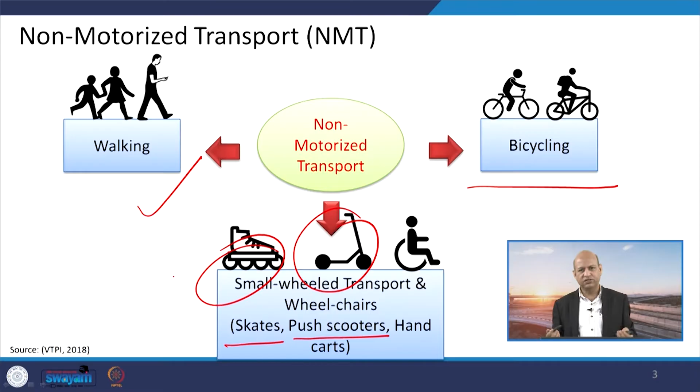So mobility through walking is one part of non motorized transportation, the other is bicycling. If you have bikes, pedalled ones, small wheeled things like skates or push scooters or hand carts, small carts that can be pushed or pulled, trolley systems attached to a bicycle, wheelchairs or scooters - all these are part of non motorized transportation, because it does not use any engine, IC or otherwise.

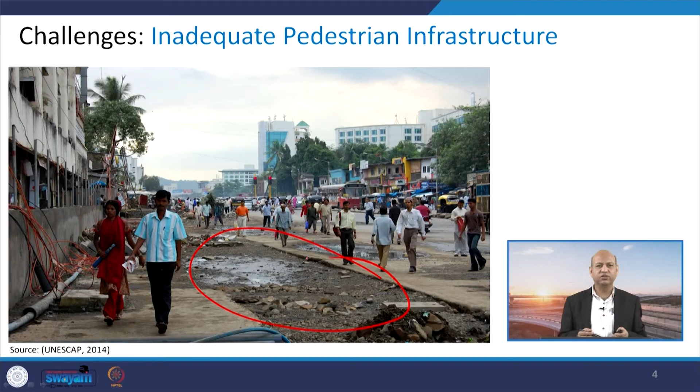Well, there are challenges. As you can see in this pictorial representation, pedestrian infrastructure is not adequate. If we do not have good infrastructure for pedestrians, people do not feel encouraged to use footpaths which are not in proper shape, and there are imbalances, potholes, so even injury can occur. So if NMT is to be promoted or improved, we need good infrastructure for it.

Another part of infrastructure is lighting. If pedestrians do not feel safe walking at a particular location, they will avoid it. For underpasses, if sufficient light is not there, we feel endangered, that something bad may happen, or some antisocial elements can approach us. So that space must be properly lit.

Again, if there are no sidewalks at all, we have to walk on the main road where there is a lot of mixed traffic - cars, scooters, three wheelers. That is challenging because you are at risk of being hit by a vehicle; if somebody is not able to apply the brakes, they may hit you. So these kinds of challenges are there, and we need separate footpaths or walkways.

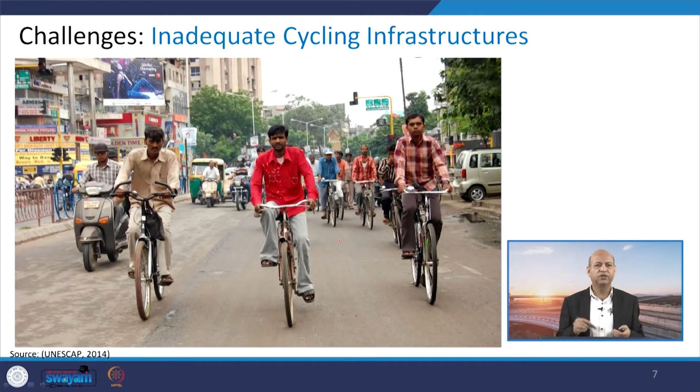Also, if you want to use a bicycle but don't have separate tracks for bicycles, and have mixed traffic on the same road, you will again feel at risk, as vehicles with higher speeds can hit you. That is why adequate infrastructure for walking or cycling is essential for promoting NMT, non motorized transportation.

Then, how do we define an advanced city? Some people may argue that it should have big skyscrapers and metros and all those kinds of transportation systems.

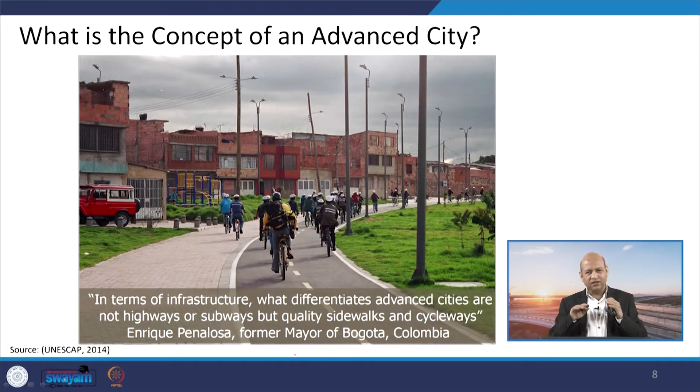One very interesting definition given by former mayor of Bogota, Colombia: in terms of infrastructure, what differentiates advanced cities are not highways or subways, but quality sidewalks and cycleways. This promotes a healthy way of living and quality of daily life, because it encourages us to walk and cycle, and it also helps calm the environment, since IC engines create noise. So the noise problem is there besides air pollutants and greenhouse gas emissions.

If you promote sidewalks and cycleways, people feel incentivized to walk through different streets for their daily work, and this is healthy. So the advanced city in his vision does not mean having very hi-fi technologies used only by a particular segment of the population while the majority struggles to move from one point to another. That is not the advanced city. The city which makes facilities accessible to all or the majority of the population—only then can we say it is really planned and advanced.

You see the concept of advanced city here: this car is using this road, and here also this car is using the road, so two people in cars are using this much wide road width, while these people walking—again two people—are left a very narrow lane. This infrastructure particularly discourages people from walking. So the concept of advanced city should move towards giving a lot of space for people to walk.

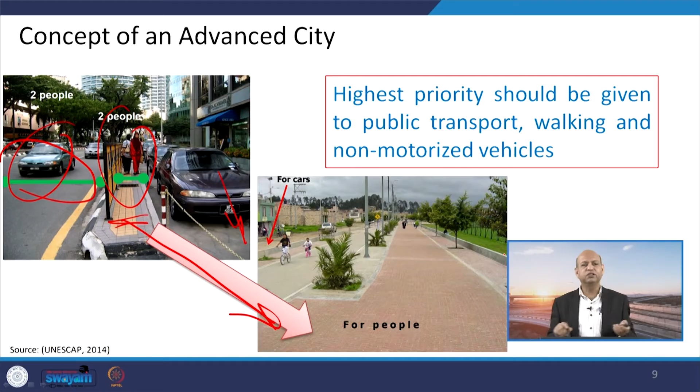Let me share my experience with you. In Germany, we saw for the first time that pedestrians and cyclists are given first priority to cross the road. If you put your feet on the road, all traffic applies brakes and allows you to walk through. Initially we were quite hesitant because we were not accustomed to this kind of facility or priority, but later on we became confident to walk through zebra crossings and those points where people are given preference as the first priority to cross the road. This concept should be inculcated and integrated into the public transportation system as well as the complete transportation system of the urban environment.

You can see a positive sustainable reverse traffic pyramid. Right now in Indian cities, a lot of space is occupied by private vehicles—cars, two wheelers, three wheelers—and very narrow space is left for people walking or using bicycles. If you reverse this trend and apply this reverse traffic pyramid, we give first priority to people walking or jogging using walking lanes, or using bicycles, utility bicycles, carts, or trolleys—those things can also be used with bicycling. Then after that comes the public transportation system.

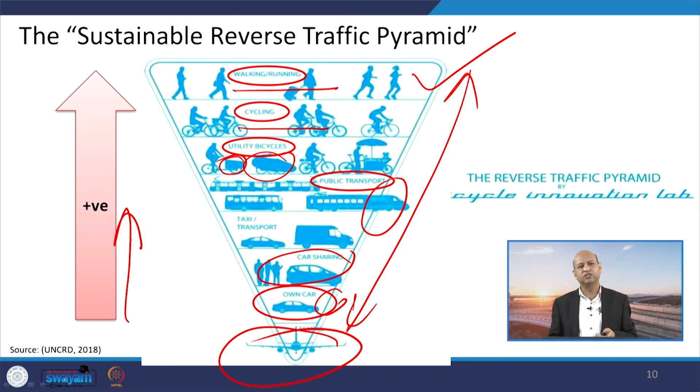Then the commercial sector—taxis, transportation, trucks—followed by car sharing and pooling, with privately owned cars last. Air traffic is mostly isolated at the corner of the city, so it is always last. If we design the urban transportation environment to give first priority to those walking, running, and bicycling, a clean environment can easily be achieved. This is the positive way of encouraging sustainable transportation through a non-motorized transportation system.

So what should we do to achieve that? For a sustainable mobility approach, we have to move beyond a purely engineering approach, which is quite mathematical, dry, or robotic—where we only see physical dimensions, like how much road we need to develop, without seeing the larger implications. For an alternative, sustainable mobility approach, social dimensions must be addressed. So beyond physical dimensions, we have to see the social dimensions.

So, what kind of public we are addressing in our city, which income group people are in, in which proportion, are they comfortable to use the paths or infrastructure which we are providing—all these things we have to see. So, the socio-economic dimensions we have to look into properly.

Mobility is the focus of those engineering or old age practices, but when we talk about sustainable approach, we have to focus on people and those who do not want to use vehicles, or they want to use walking and these NMTs. In larger scale traffic, cars etc., they see the larger picture that so many cars are registered.

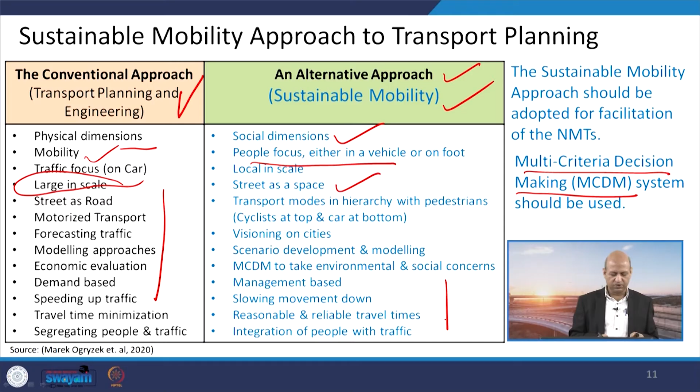And then speeding traffic—we have traffic lights because there are chances of accidents etc. Speeding traffic we have to keep in mind, but in this particular alternative approach our traffic is calm, cool, slow, and people can still do their daily work. So those kinds of things we have to see in this sustainable mobility concept.

Then there are benefits of non-motorized transport—you can call them co-benefits, or direct and indirect benefits. It can increase transportation options because it is quite usable by every kind of person. Anybody can walk if facilities are nearby, or even for 2-3 kilometers people can use a bicycle.

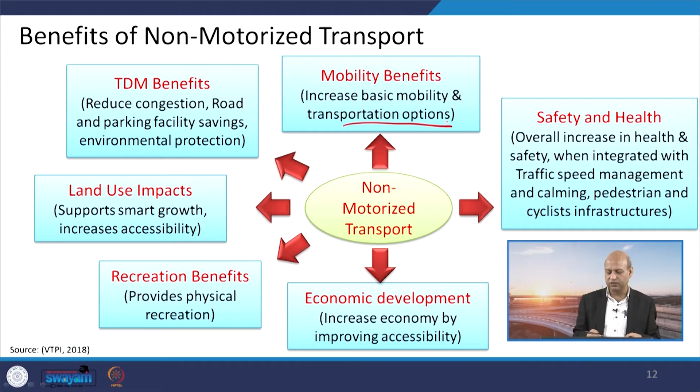So, those kinds of amenities, if we put them at small distances, then people may feel incentivized. Otherwise, if big malls are there at a corner, then of course people will not like to walk there, but they have to use a car etc.

Then safety and health issues are there, because it has been seen that those people who are using most of the non-motorized transportation systems like walking and bicycling etc., they are more healthy—because it is a kind of exercise also when they are walking or using a bicycle.

Economic development, because it improves accessibility for each person—the majority of the population can use these kinds of NMTs. Then recreation, because when you are cycling, walking, and it is not very high speed, that kind of recreation is also there—you are enjoying your surroundings, and that is one benefit.

Then land use impacts—again, the accessibility from one locality to another is there, and smart growth can be achieved by this kind of land use planning when you are using bicycles etc., in the fashion of public bicycle hiring facilities. All those kinds of smart growth are there.

Then there are some other benefits, for example parking facility savings—because if you have to use a car, you have to use some parking space, you have to pay some money for that. So those kinds of things are not there with NMTs.

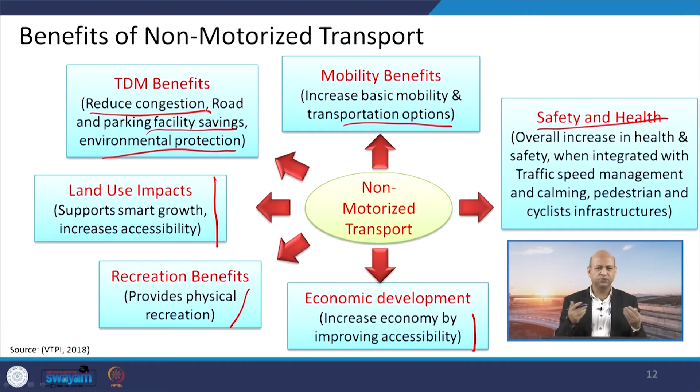Then reduction of congestion, because cars etc. need more space, and a small number of people using those kinds of vehicles are increasing congestion, so a lot of fuel burning etc. Those kinds of things get away with NMTs.

Then we have to do some strategic planning. So what are those strategies to achieve this sustainable non-motorized transport? For that, the public bicycle system, PBS, has to be promoted.

Then multimodal access guide including maps etc., because when you are promoting this bicycling, there should be some track-kind of guidelines that this track will meet another track, and there may be some transition zones also. So those kinds of information should be there.

And then integration of pedestrian pathways and transits—in the sense, for example, you want to travel let us say 20 kilometers, and you do not want to use a bicycle for the whole 20 kilometer stretch.

So maybe you go 5 kilometers by bicycle, then use some public transportation system, whether train or low floor buses, which provide lot of space for your cycle, and you can use this cycle when you get down at the next station, then again use the bicycle. So those kind of integration has to be there.

And grievance systems means if there are some issues, there must be some way of addressing those issues. Parking amenities must be proper, otherwise where will you park your bicycle? At certain locations there must be dedicated parking systems for bicycles. And if something happens, like some part is broken, there must be a facility. We will see in next slides that there are dedicated service points, you can telephone them, they will come to you and provide some transportation mode for you to reach your destination, and then provide you your bicycle after repairing.

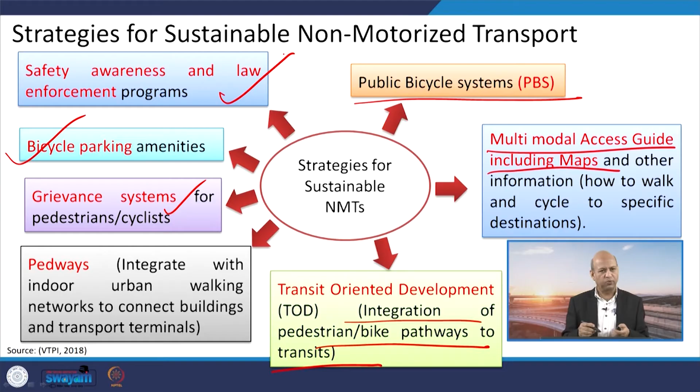So all this insurance and parking management, or this integration, as we discussed earlier about these strategies - when we want to integrate, cycling routes to public transportation joints must be there, otherwise how will you reach a particular point or joint. Then facilities at public transportation nodes - you want to park your bicycle, use the public transportation system, and after office work come back and use your bicycle again to reach home, like last mile connectivity. So those facilities must be there for parking.

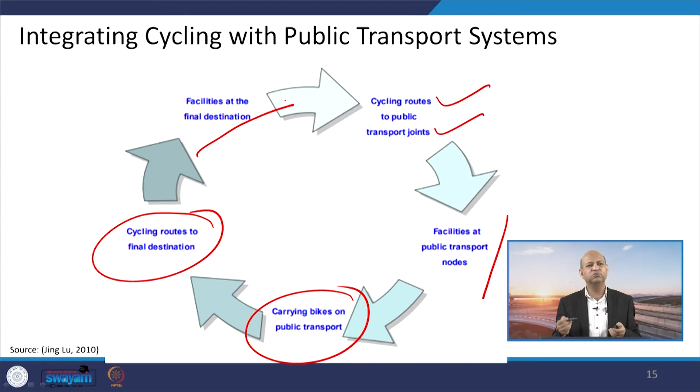Then cycling routes to the final destination - again from source to destination, those routes must be there, otherwise you will feel problems and will not enjoy bicycling to that destination, and facilities at the final destination again. So this kind of cycle is a virtuous circle rather than a vicious cycle. Virtuous circles must be there to connect from source to our final destination.

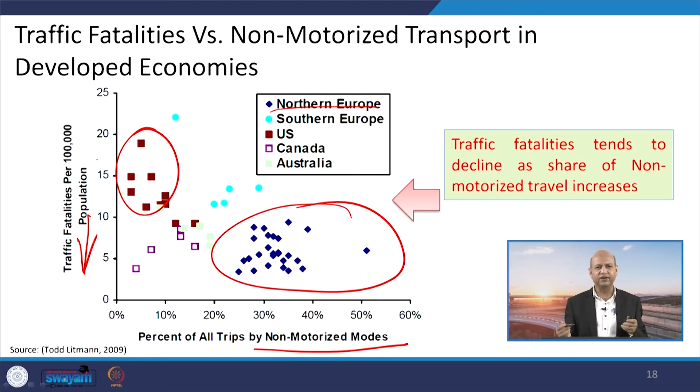Similarly for traffic-related fatalities - as you grow in number of non-motorized modes, these fatalities come down very much. So Northern Europe, where most people use non-motorized transportation modes, has very less traffic accident related fatalities. But US, which is known for its automobile industry, you can see lot more fatalities in comparison to these European countries.

Okay, now we come to this best practice example, which is Copenhagen in Denmark.

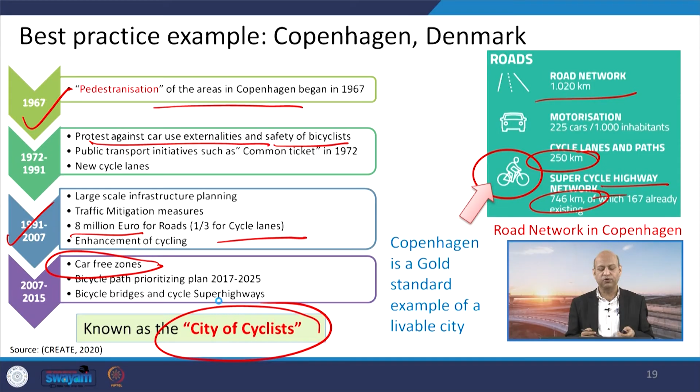So you can see how much promotion or investment is there for infrastructure dedicated to walking and cycling. Since 1967 they are promoting pedestrianization of the city, and later there was protest against cars because pedestrians were not having a comfortable journey. There was a lot of demand from the public, and later cycle lanes were constructed - around 1/3 in 1991, 8 million euro for roads and 1/3 for cycles, and slowly car free zones were made, completely no cars there. This promotes walking and cycling, and nowadays it is known as the city of cyclists because of these policy measures.

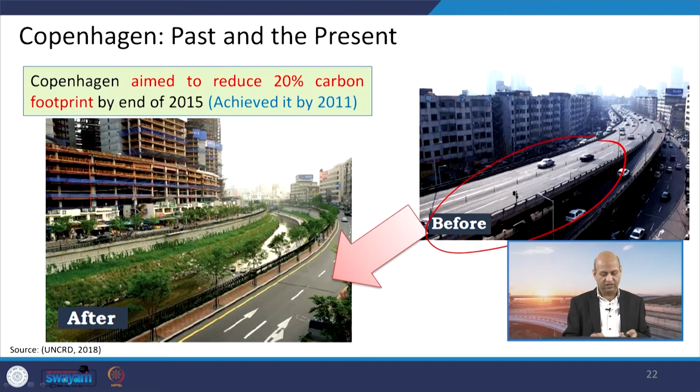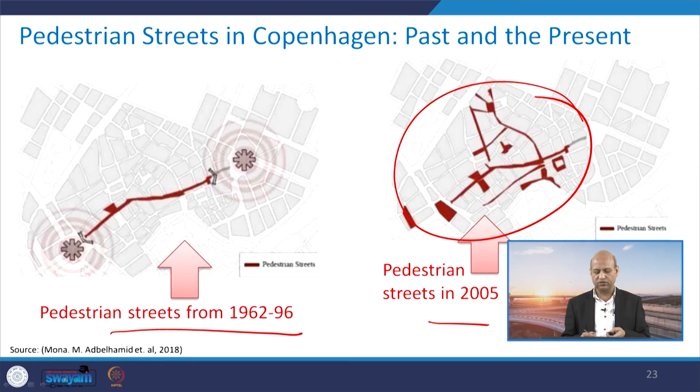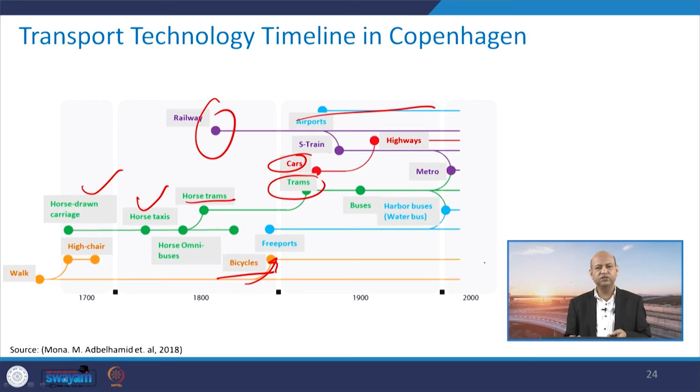Similarly, this is one timeline for different transportation modes. Earlier horse drawn carriages were there, then horse drawn taxis or trams, then railway came around 1800, then bicycles started, then trams, cars, and then airports started. All these mixed together, but bicycling usage increased, and now it is increasing more and more because of campaigns for healthy life, freedom from fumes, emissions and noise.

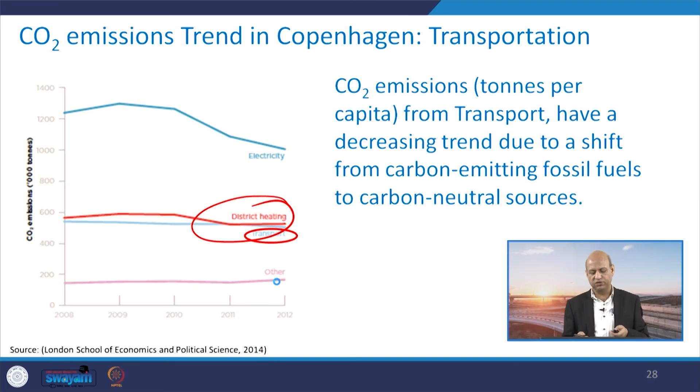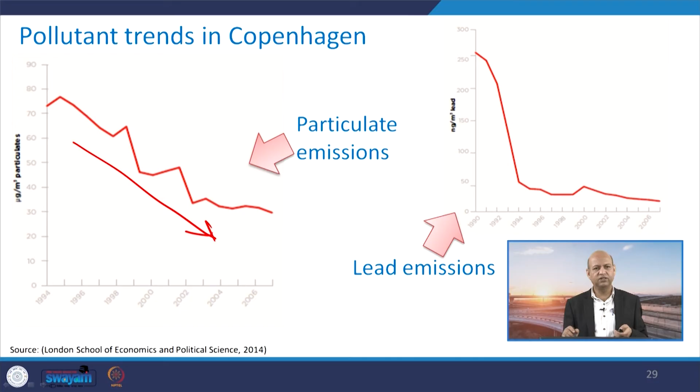Pollutants, like greenhouse gases as well as air pollutant emissions, are also in a decreasing trend over the years. Lead emissions have also decreased as we have used unleaded gasoline or petrol. Similarly, several policy interventions have been there, so lead reduction in emissions has been achieved very significantly, as you can see.

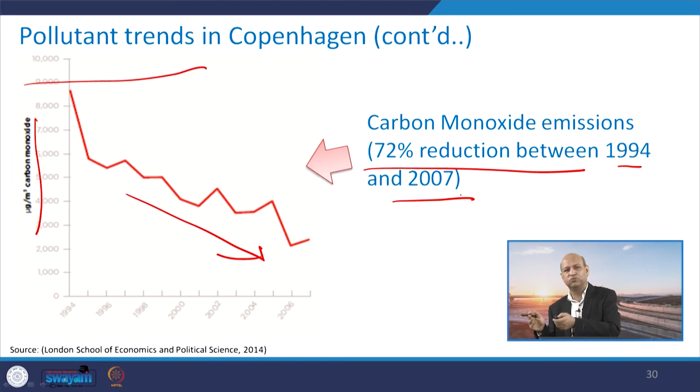If you see the pollutant trends overall, carbon monoxide, which is one indicator of automobile emissions, and NOx emissions are two big indicators of automobile fossil fuel based transport, means petrol, diesel, those kinds. These are again decreasing, proving a 72% reduction between '94 and 2007. This is a big indicator that the transportation system is shifting towards NMT, non-motorized transportation.

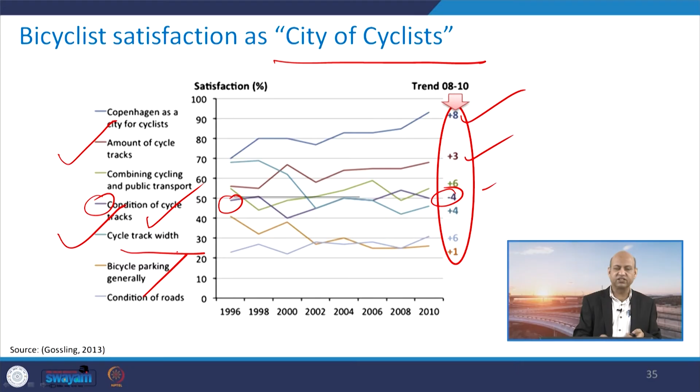Then for city of the cyclist, different indicators like amount of cycle tracks and cycle track width - most of these indicators have a growth plus sign. Only one indicator, the condition of cycle tracks, is minus, meaning according to their standard that condition has not improved so far, because tracks are increasing, a lot of money is being invested, and campaigns are going on. Other indicators are very much positive and promoting, but this will also be addressed. Track width is increasing, track length is increasing, parking facilities are increasing - all those things are increasing.

This policy to promote NMT is going on, and in the present day bicycle peak hours - when we normally think of peak hours as congestion of cars, buses, etc. - here people are more in number on bicycles, so it is quite comfortable. It's not like standing in a place where lots of fumes and pollution are there, nothing like that. Otherwise it is quite clean and calm.

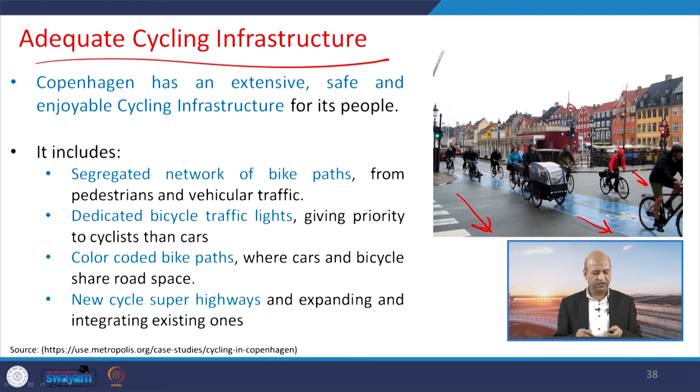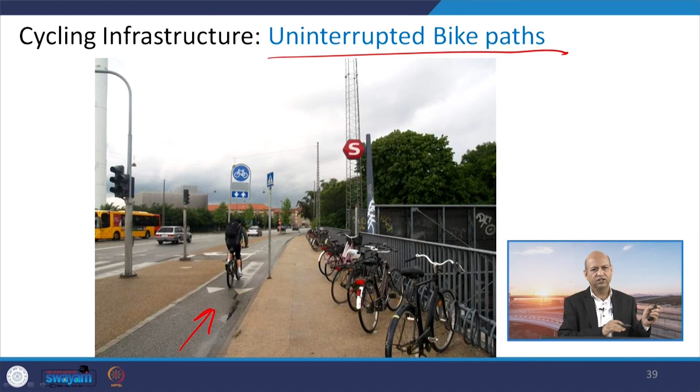Adequate cycling infrastructure means, as population grows, they also plan for additional cycling ways and footpaths - dedicated cycling lanes, as well as different paths for walking, plus different kinds of paths for cars. Plus uninterrupted bike paths, meaning these are dedicated ones - no scooter, no car, nothing else will come here. They have designed it in such a way, height and width, so that other transportation modes will not be able to use it. It will be only for bicycling purpose.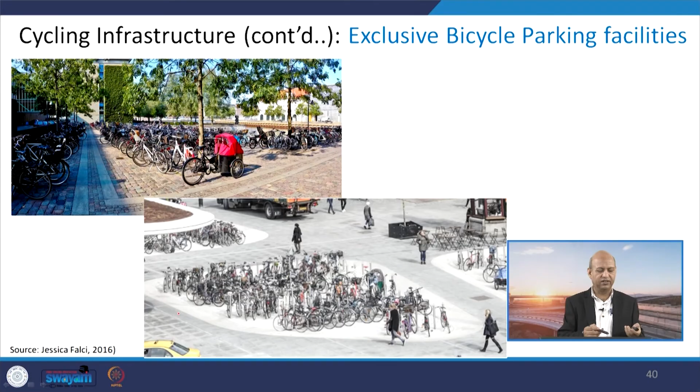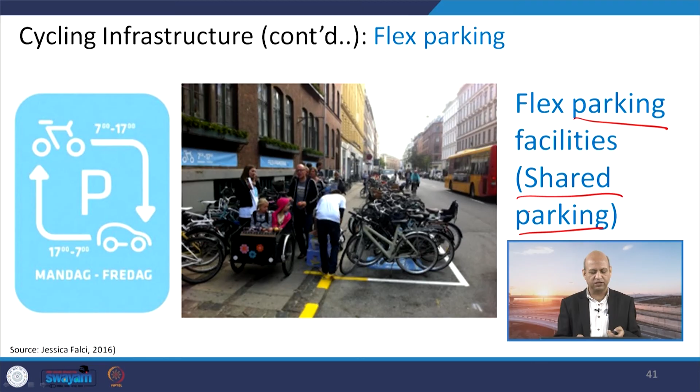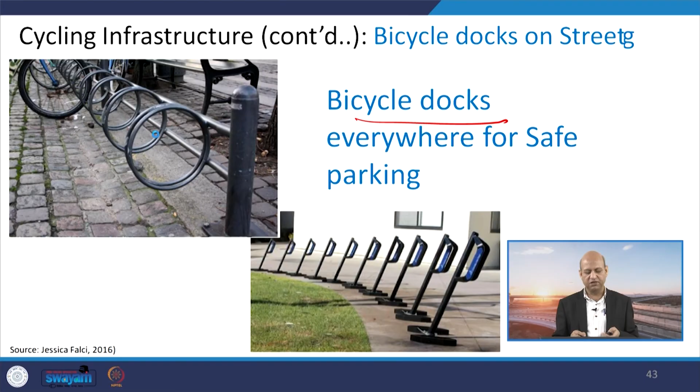Parking lots are properly planned, and this infrastructure has to be provided which is exclusive. There are shared parking systems - common parking may be there where you can park your own bicycle, and if you have hired a bicycle, that also you can park. Similarly, there are dedicated modern parking systems for bicycle docks, where you can easily and safely put your bicycle. There are also signages for routing properly - bicycle preference, so that bicycle will go and other modes are not preferred. And beautifully, aesthetically appealing bicycles are there for the public bicycling system through PBS.

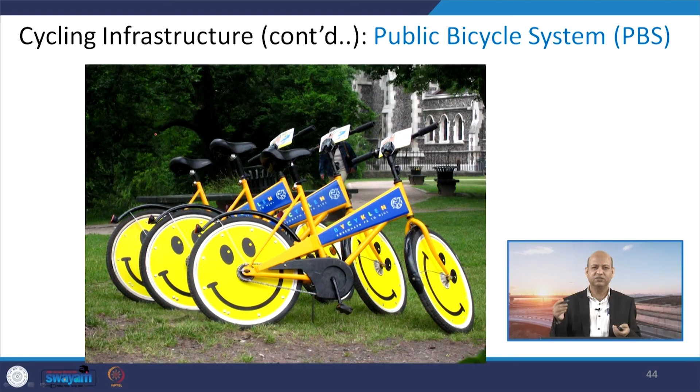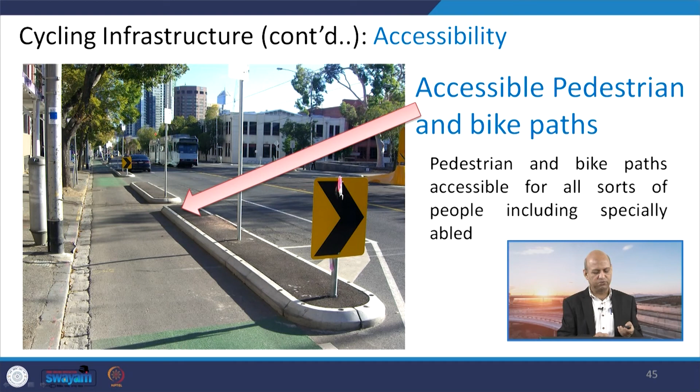The accessible pedestrian and bike paths must properly change from pedestrian to cycle or cycle to pedestrian, those kinds of systems are there.

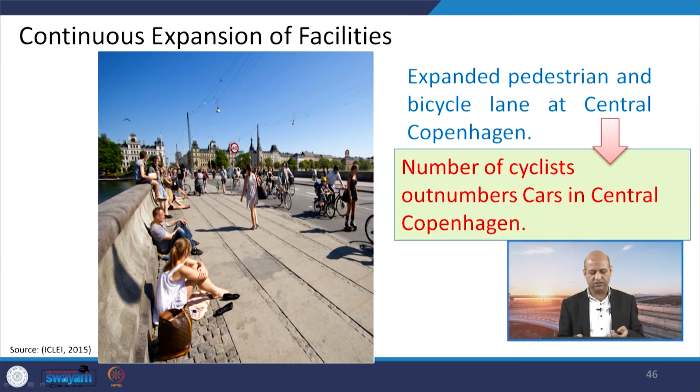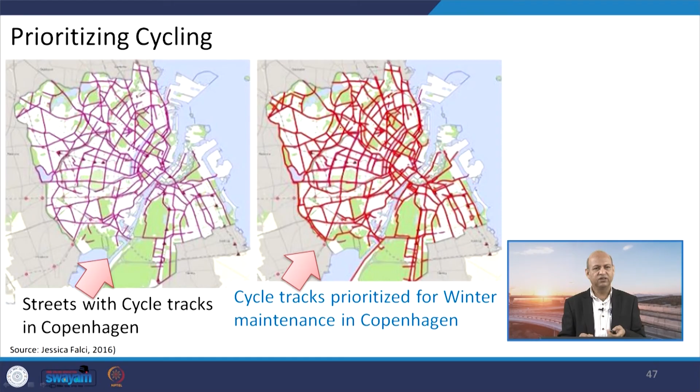Continuous expansion means earlier these bridges were used for cars, but later on car-free zones were made, and the number of cyclists now outnumber the cars in Copenhagen. You can see how these dedicated tracks for bicycles, this network has been made properly in the entire city.

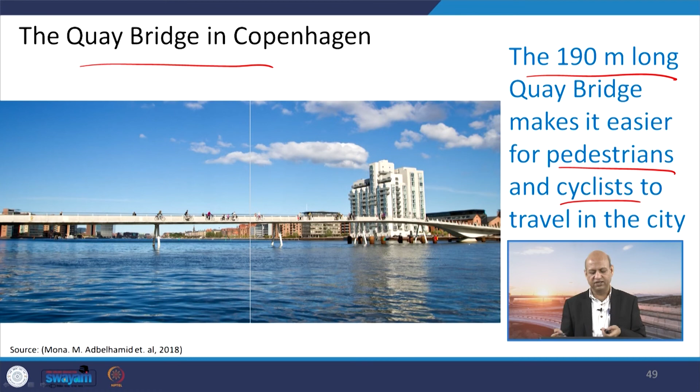Similarly, this Quay Bridge is also 190 meters long, for pedestrians and cyclists. It is free from traffic, and you can enjoy the beautiful scenic beauty of the river and open sky. So these are incentives for promoting cycles.

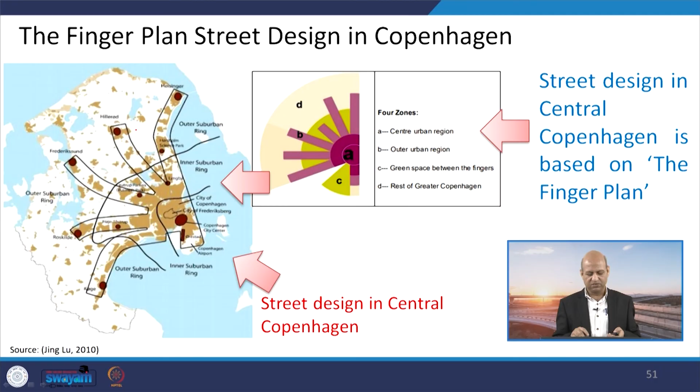This is the finger plan street design in Copenhagen, because of its land mass being shaped in such a way, for outer urban area, center urban area, and so on. Palm-like planning is there for Chandigarh city also, if you recall. This kind of planning has been there in street planning for pedestrians and cyclists in Copenhagen.

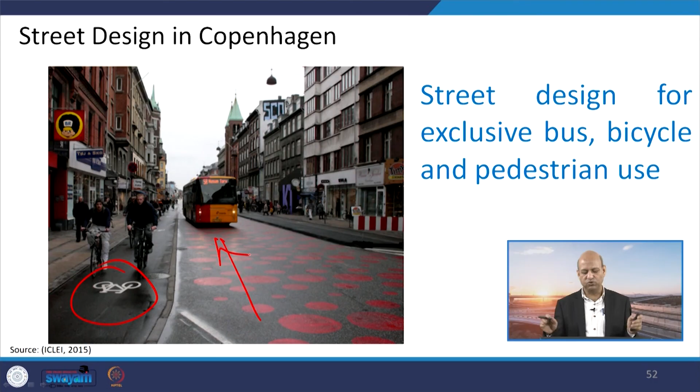You can see the street design in Copenhagen, again with dedicated bicycle lanes, then the public transportation system. They are separate lanes, no mixed traffic, and you can just move comfortably.

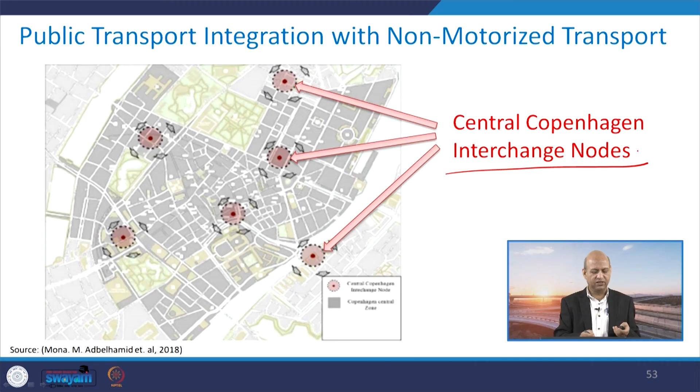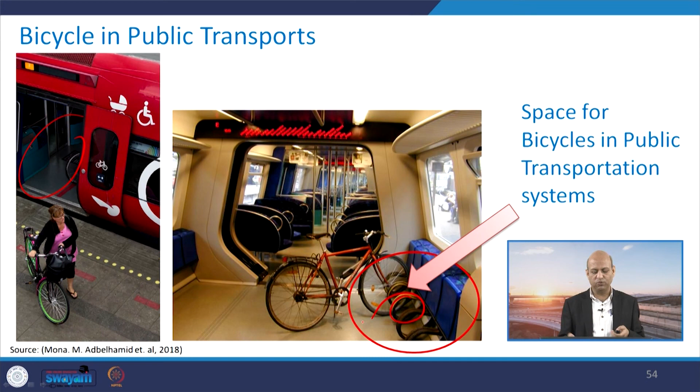Similarly, interchange nodes mean if you want to go from one place to another and use your bicycle, there are certain places where you can change your transportation mode. You see these trains have spaces for bicycles, even for parking them within the compartment. This kind of public utility system and parking system within the carriages gives you the incentive that you can take your bicycle and go from one place to another using trains as well as buses.

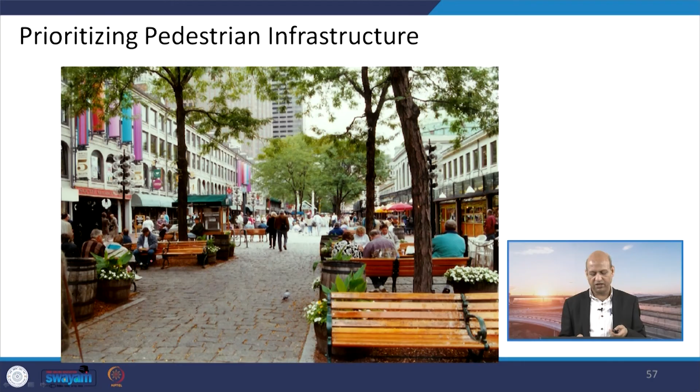In conclusion, we can say that non-motorized transportation has benefits, and it has to be safe, reliable and carbon neutral, because it does not emit any greenhouse gases. But there are certain challenges in terms of infrastructure facilities which we have to provide as per the quality, only then will people shift from motorized to non-motorized transportation systems.

Bigger planning is needed, so that facilities are nearer, where people can walk or use bicycles rather than using cars or scooters. That holistic system has to be in mind when we plan a city to promote cycling and pedestrian use. That is very important as a policy aspect and vision for the smart city, healthy city and quality city.